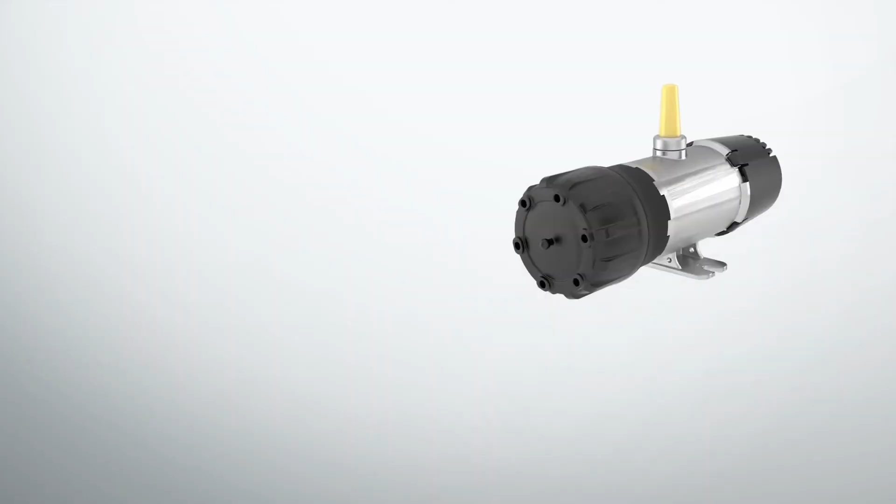British industry is changing at a rapid pace. Innovative new technologies have changed the way things are done, and there is a growing focus on how to operate in a more efficient, safe, and sustainable way. Companies are finding they must now use the latest advances to remain competitive, and as an awareness of climate change and the problems caused by pollution grows in society, the demands of their customers mean that they must consider the impact of their operations on the environment.

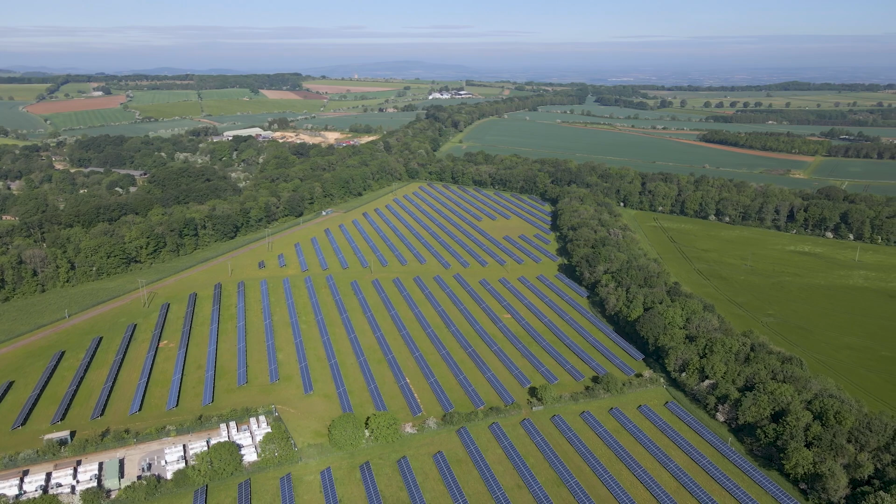There is also a growing move to turn to the use of renewable energy sources. For example, solar energy technology is advancing rapidly, making it more efficient and easier to install. In the next half hour, Executive TV will explore these new developments through talking with a number of industry experts from some of the most innovative and industry-leading companies in business today.

With increasingly clear evidence for the reality and damaging effects of climate change, key figures in industry are calling on governments to show initiative and take the lead on action to tackle the problem before it's too late.

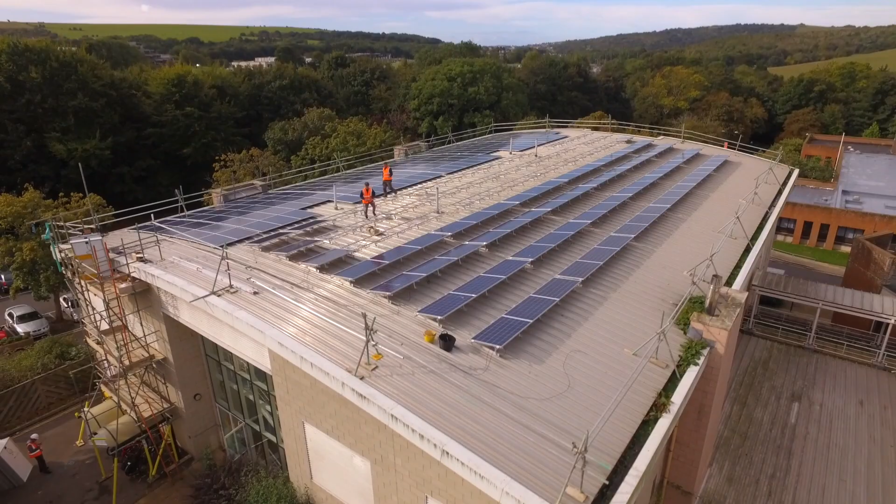We know where we are in terms of the effect that the last 50 to 100 years has had on the planet. We know that. We can't fix it, we can't turn back the clock, but we can look at the future and we can do something. Unless there's the investment, unless there is buy-in across everyone, from local government to the government as a wider scheme, to the corporates, to the individual, to the household, to the system, to the property owners. Unless we're all saying, right, I'll do my bit, then nothing's going to change.

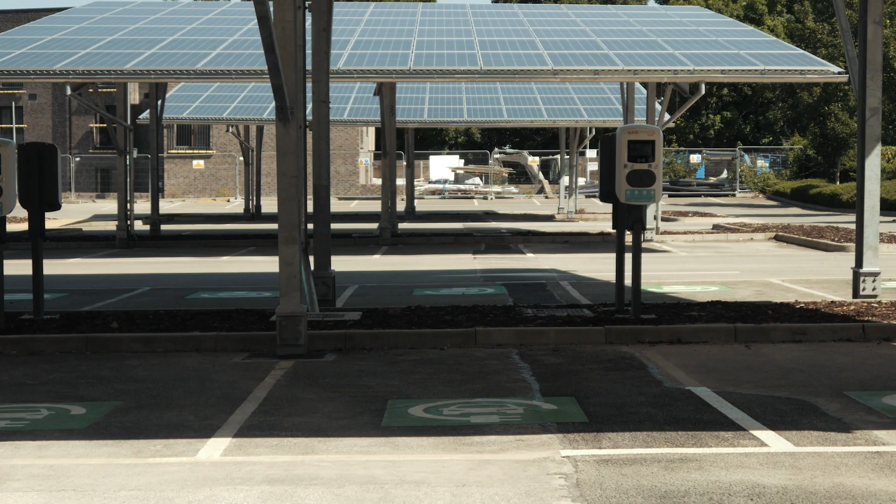We need to basically make sure that we're reducing carbon emissions and putting in place methods to mitigate this and to offset it. The government has got to step up in creating that infrastructure and creating the incentives and opportunities to reduce these emissions and develop low carbon technologies. We need to be developing in this future, we need to be pushing it.

There's been a number of years where the energy industry in Scotland has been perceived as declining, and this is a new wave, an energy revolution as it were, and the Scottish Government is absolutely on track to harness this to its full potential. They have set up programs between countries. There's a specific program between Scotland and Germany, not the UK and Germany, Scotland and Germany, to export energy in whatever form that takes, whether it's electricity or hydrogen. And the Scottish Government is very aware of the energy resource that we have in our wind power, so they are working very hard to make sure that it's harnessed to its absolute maximum.

With regards to the government and the offshore and onshore renewables, there should be more money. From a complete finance perspective, there should be more money put into this. There are so many other things that they do, but in reality, what drives everything within this sector is money, and how that can be spent in a better way to actually provide better offshore and onshore renewables.

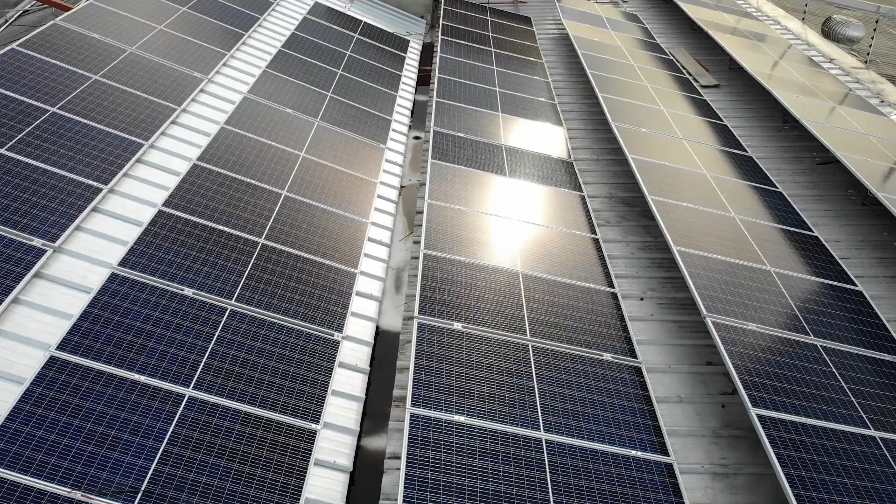Customers are demanding change, making a new focus for businesses and organisations on becoming more sustainable in their products, services, working practices, and supply chains. Many business leaders are genuinely concerned with their organisation's impact on both the ecology and local communities. Innovation is proving key in this new focus. New ways of doing things can lead to both efficiency and sustainability.

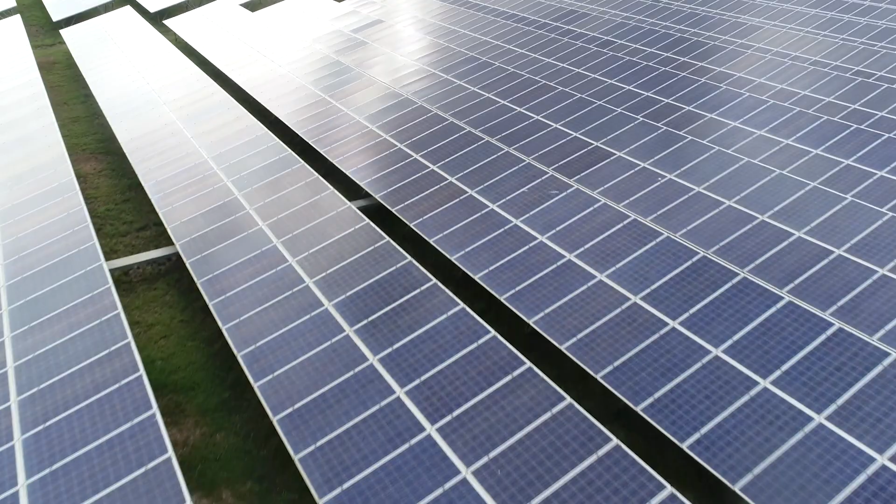Across the UK, a range of sectors from agriculture to commercial organisations are now looking to the low-cost and sustainable energy benefits offered by solar power generation, and its part to play in working towards the target of net zero emissions by 2050. Sustainability is very important, and I see it as becoming even more important as we move forward.

Everyone is focusing on making sure that their business is as sustainable as possible. It is a question that we are asked now by potential customers in a way that we weren't before, and we have to demonstrate our sustainability credentials. But this is not just lip service. We actually need to do this as the human race and for the planet as well.

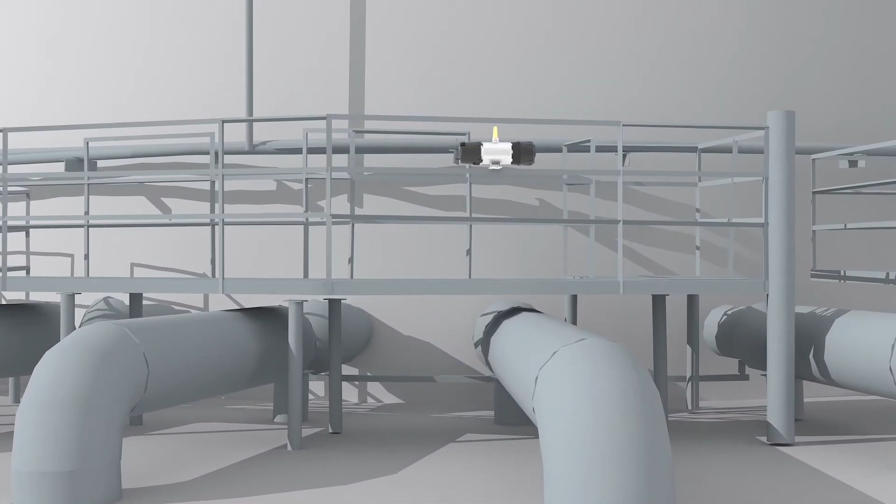One of the things that we have brought out recently, which the main focus for the customer was to be able to increase safety at a reduced cost, has actually had a sustainable side effect. This is wireless gas detection. We are able to implement gas detection across large areas, say of oil terminals or refineries.

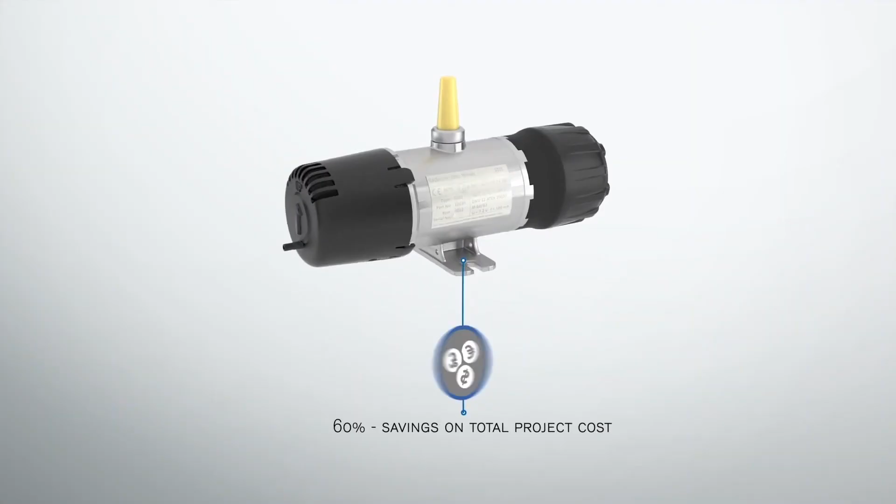This wireless communication is something that has been around for people in their day-to-day lives for a long time. But when you bring that into an industrial environment, you have to do things differently. It must be more robust, more cyber secure, and more reliable. This isn't just like your normal Wi-Fi. So as energy prices increase, we need to be looking at other methods of sustainable energy, and therefore we need to look at new technology.

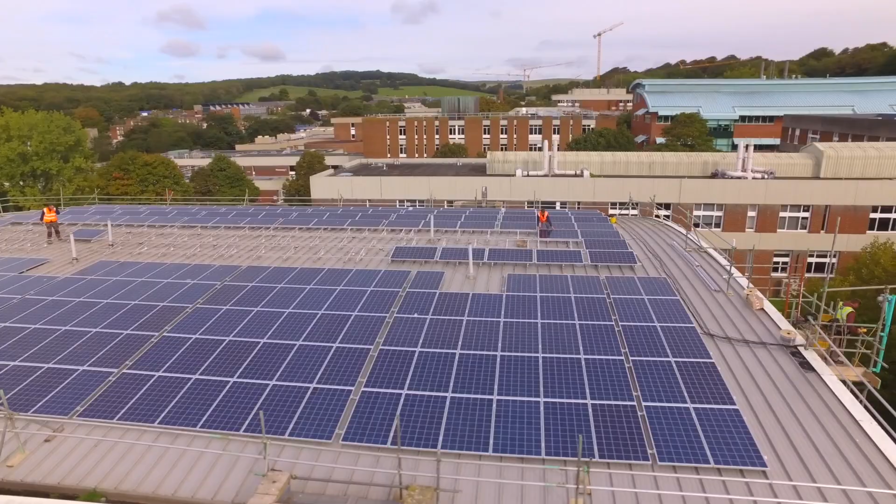And therefore it's vital that we push towards implementation of those into our business, so that we make cost savings on our balance sheet in terms of reduced energy consumption, but also by utilising energy more sensibly. Renewable energy needs to be more accessible, not just for the user, but in the manufacturing process. It needs to become more affordable and more accessible to individuals, companies, people.

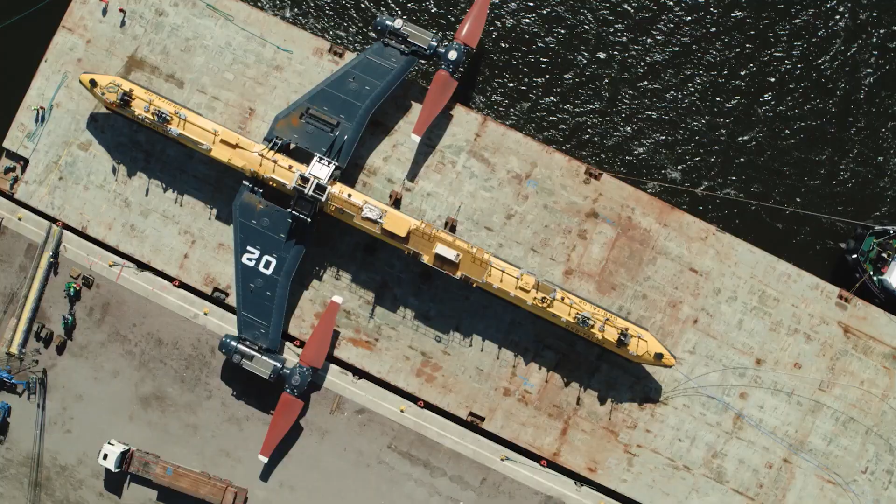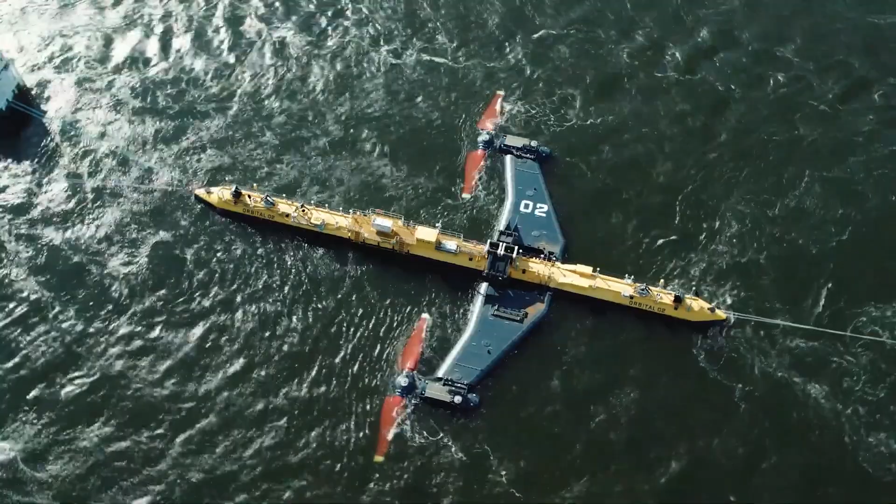Renewable energies are key for Britain. It's part of our journey as a company to work in the renewable sector. We are in the renewable sector. Would we like to be more? Yes. There's a lot of these big renewable projects being carried out all around the UK, and it doesn't seem to be being built in the UK. This seems to be getting put into other countries that can build it a lot cheaper than the UK, and it's not fair on companies. It's not fair on companies that really want to work in that marketplace and really want to build a future in there.

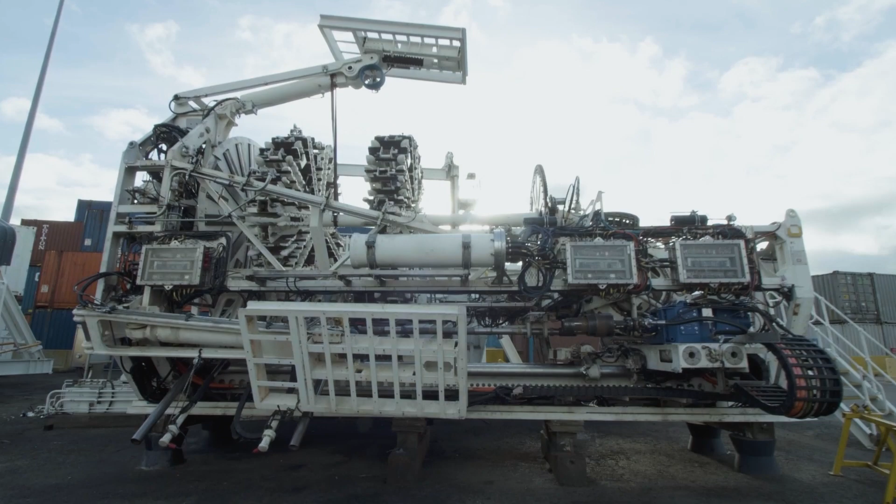But we need that sort of support to make sure we can make it viable. I think it's very important for sustainability in our supply chain. It's all about keeping it local content. If we're going to be building something in Scotland, everything should be locally sourced. But again, that's very difficult for us to do when we are competing against other countries. And that's what I find very difficult with sustainability. How can you have a project in the North Sea, but it's getting made 5,000 miles away and shipped across? I don't understand how that sort of works for a company to be sustainable when you're dealing with that kind of marketplace.

Obviously us as a company are only just starting this journey. We have an opportunity as well that we could be building another facility that will be run purely on hydrogen. So as well, we've got our vans - now we're getting electric vans onto the fleet. It's really looking at us as a company: what can we do better? How can we do it? It's obviously a journey that's going to take us over a number of years, but we're always looking at other ways to be smarter and greener.

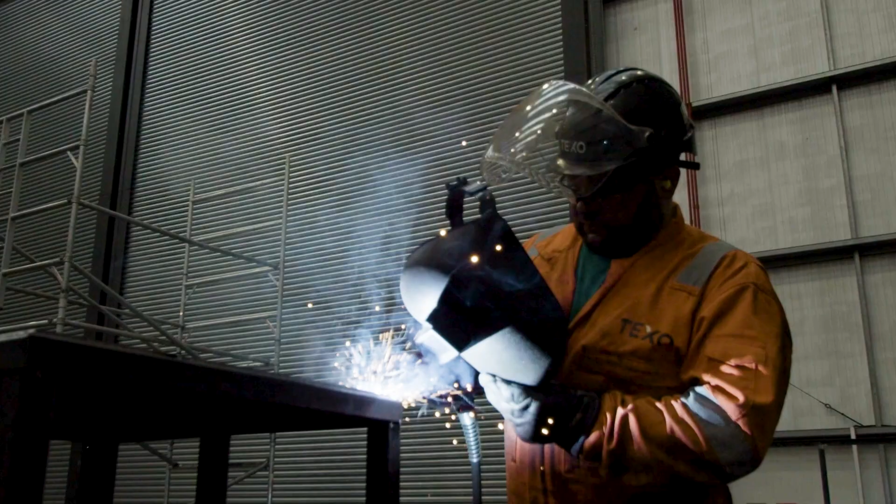The role is we support all renewable and offshore vessels here at the Port of Blyth - vessel mobilisations, demobilisations, as well as bespoke fabrication for the energy sector. The biggest environmental challenge has been being so close to the river and the North Sea. A lot of equipment that we build, we have to assemble, and that would take hydraulic oil. So we need to use bio-friendly oil to make sure that there's no leaks that go into the river and respect the estuary that we're working on, and respect the North Sea.

We try to make us more recession proof, looking at different markets we could penetrate and making sure that these 7 companies become one - moving away from the silo mentality to form a one-stop shop with 7 services all working for the same common goal, and that's TEXO.

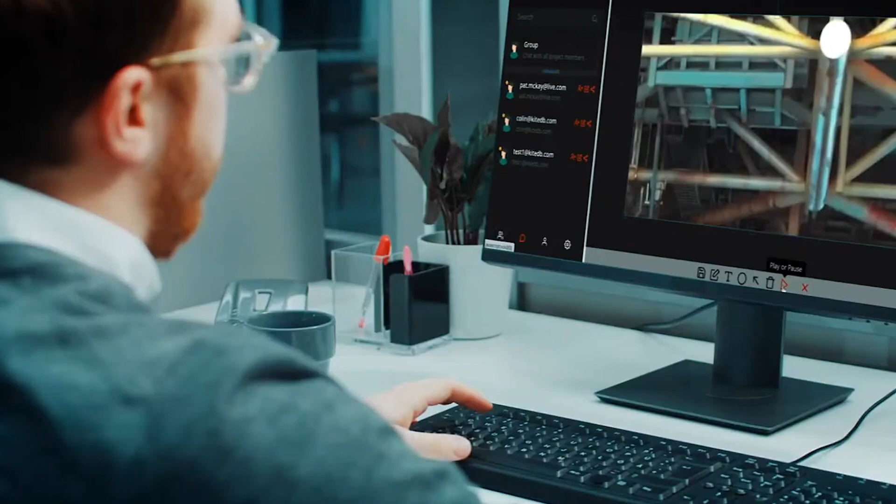So the 7 services are: engineering fabrication; recruitment, which is an external agency but also handles our internal guys offshore; workspace solutions, which is modular buildings and office space, both onshore and offshore; integrity, which is rope access, NDT, and inspection services; then Livestream, or TEXO Technologies, which caters for anything to do with the technology side of what we do; then Port Services, based in Blyth, which does a lot of vessel mobilisations and complex operations, and we have a facility there for fabrication; and then in Witham, Essex, we've got TEXO DSI, that's our drone and surveying side of what we do.

Innovation and new technology have meant safety is also a focus, and this area is also moving forward at a rapid pace. Advances in gas detection monitors are also making safer environments for oil rig workers and firefighters, with the potential to save lives. Safety is a massive concern for our customers, and I hope that we can take care of that safety aspect with some of the technologies we use. If you look at the drones, that takes away the necessity for people to go into unnecessary environments, be it on top of a roof or inside a cargo tank - we can do that by a drone.

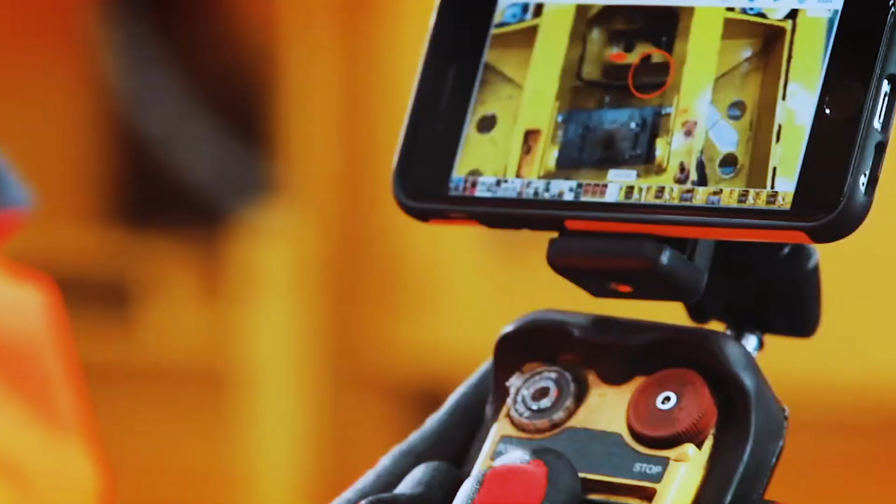We've then got the live stream capability as well, where unnecessary travel, no need to travel anymore, that can all be done from the comfort of your office. So it really stops putting these people in hazardous conditions for no reason.

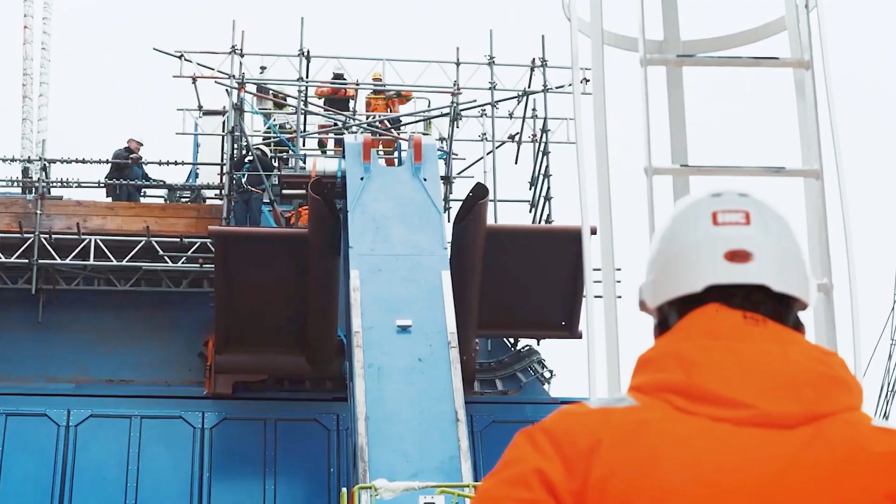The extreme environment of the offshore sector means that the equipment we fabricate and assemble, we also have to follow it out to offshore. That means having our guys and girls fully trained in offshore survival, helicopter training and rescue, and they'll be out for weeks on end commissioning and installing these pieces of equipment offshore.

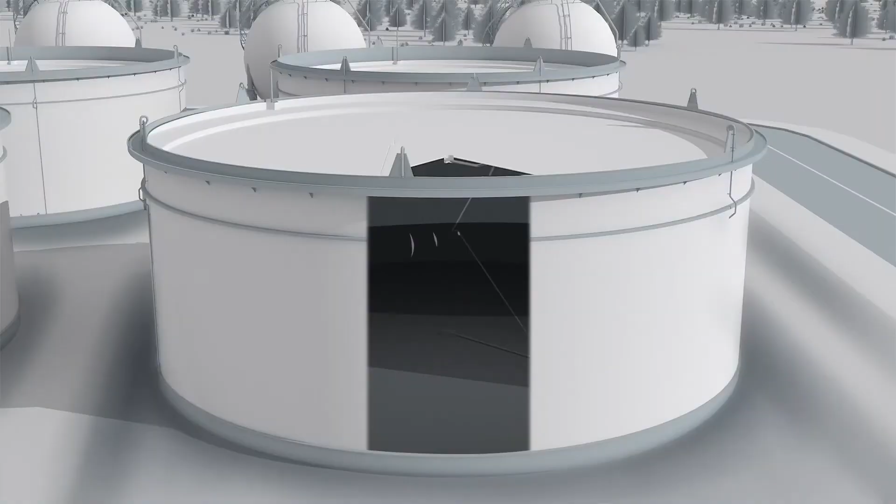Obviously our equipment has a battery in it, which is a source of power. The way it works is, should gas get into that device and that gas be ignited, the device can contain that explosion. That is how essentially ATEX equipment works - any explosion would be contained within that device. It would not get outside of the device and therefore could not cause a secondary explosion. The equipment has to be very robust.

This is something relatively new because in our personal lives we rely so heavily on mobile devices, tablets, phones - we're absolutely glued to them. But as soon as you go into a zoned area on an oil terminal or a refinery, you lose all of those pieces of equipment in their traditional sense. What you have to be able to do is put that electronic equipment into something that's safe enough to be taken into somewhere where there is an increased likelihood of an explosive gas.

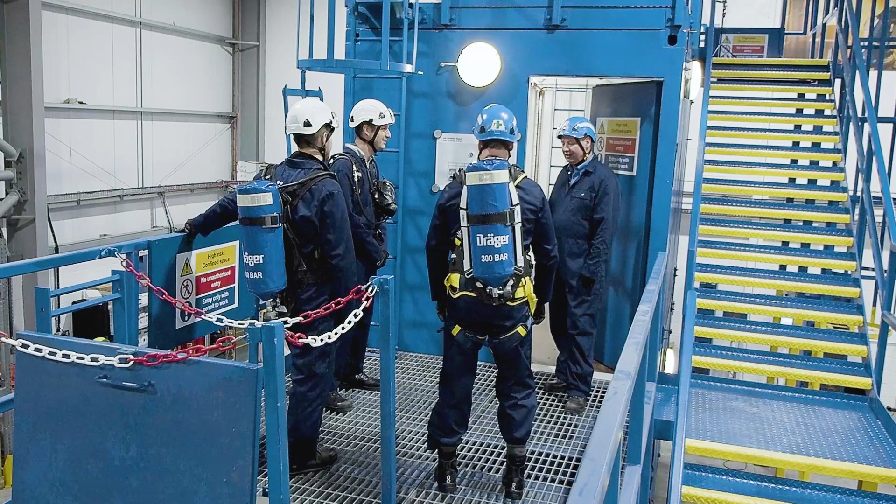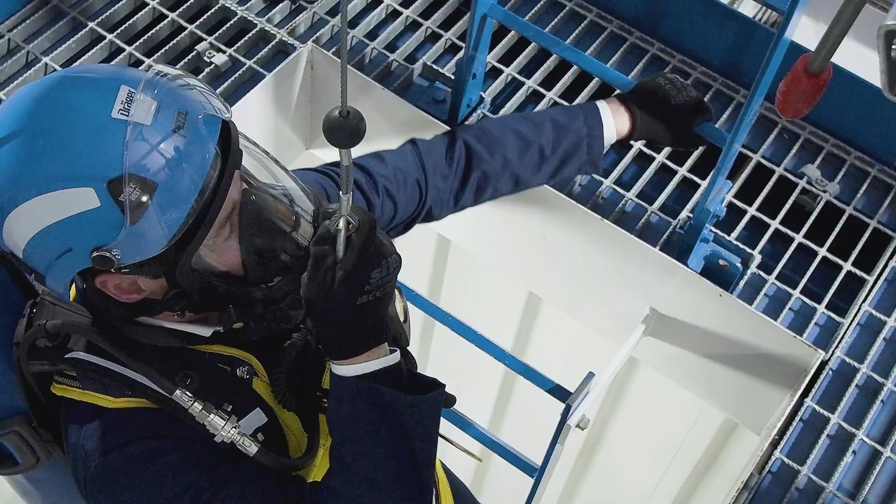That's what we're trying to achieve - bring in these more human elements where people need to physically go to a space. They need to physically provide what we call clearance measurement, which is essentially taking a reading from inside a vessel. Confined spaces are always the most dangerous in terms of explosive potential because you've got the high likelihood of an accumulation - there's not the ability for the gas to just disperse in an outdoor environment. So when we go in and clearance measure a confined space, we can send that information directly back via this Bluetooth link to an ATEX mobile phone, for example, that they are now allowed to carry on site. And then they can move on to the next space, as opposed to having to walk back to the permit office.

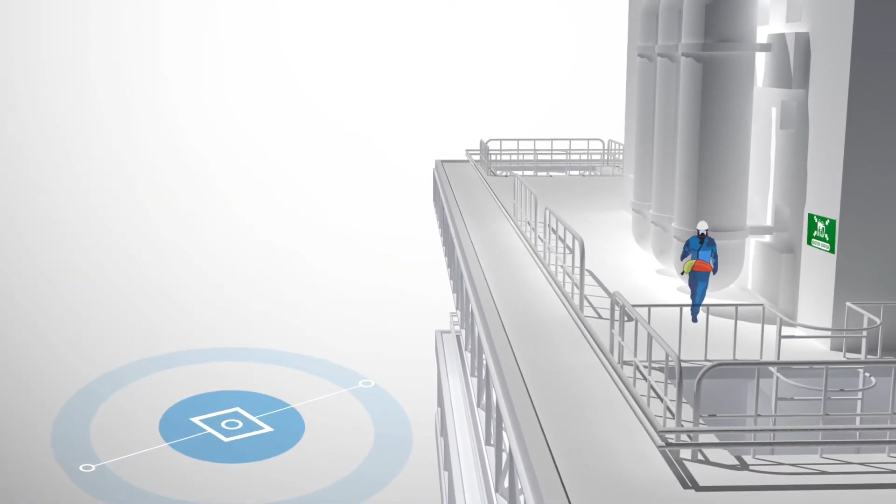It's a conflicting pressure, isn't it? These companies want to keep their people safe, but we live in a time where there's a lot of pressure in the economy, and companies are under a huge amount of pressure environmentally and under efficiency to produce these technologies in a clean and sustainable way, making sure we don't lose gases into the atmosphere that shouldn't be lost. Dräger wear these two hats of protecting people, but more and more so now, what we do is also protecting the environment by making sure these processes are safe and they're not losing gases into the atmosphere that they shouldn't be losing.

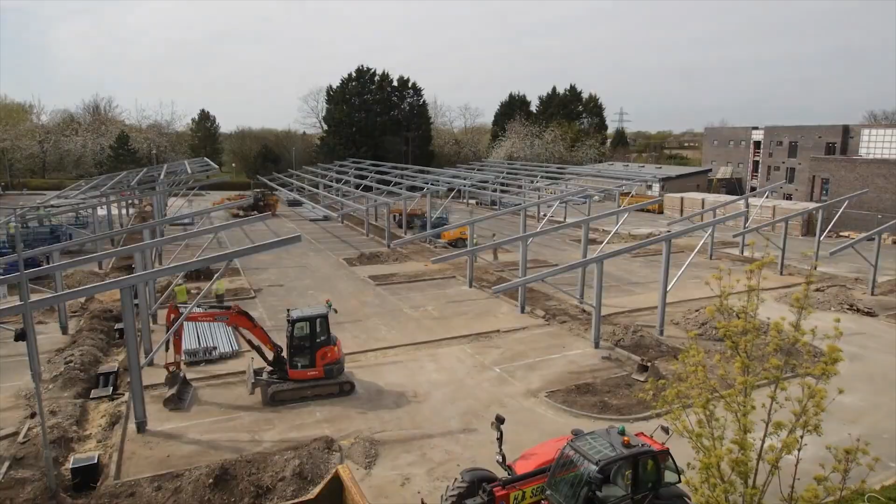First and foremost, safety is so important with a solar PV system. Keeping your system maintained is also about the longevity of the system, which also ties into performance control, maintenance, and generally keeping the system's lifespan.

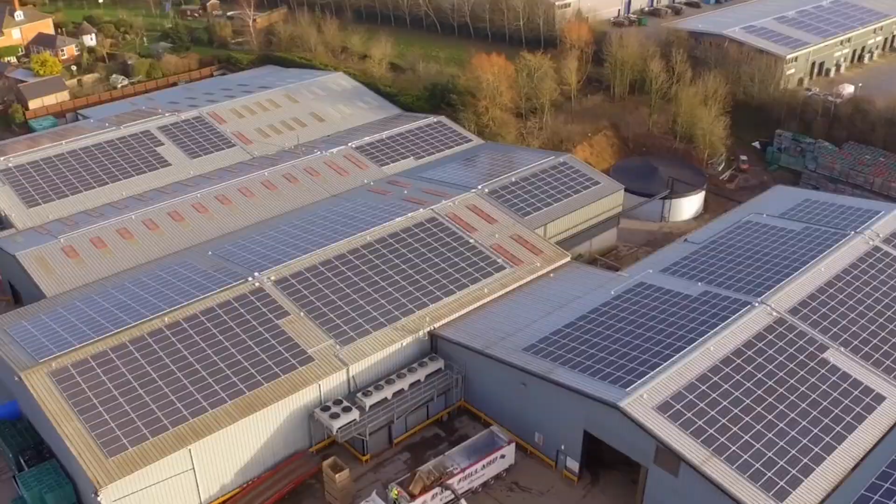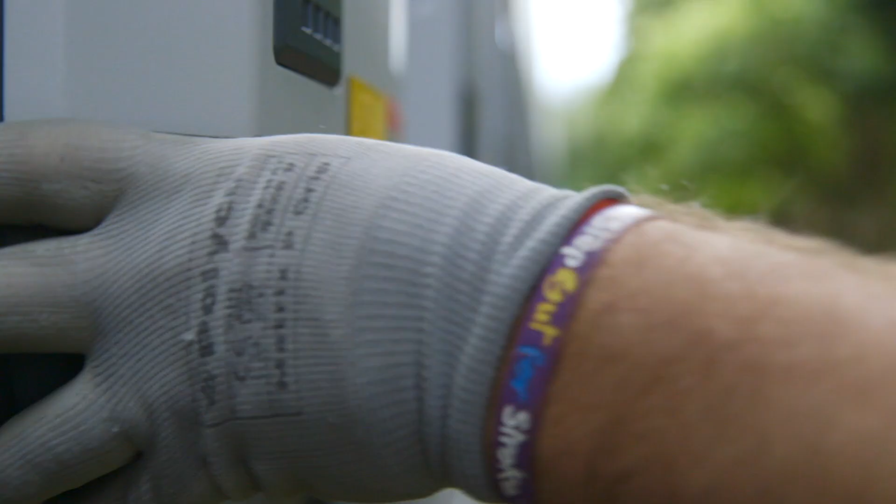At our head office, we have an advanced visual display system where we're able to monitor and keep track of our client's solar PV. If the system has got any issues, it will alert us, and we can then look to send engineers to site. This helps alleviate any downtime the system might have. So in monitoring the systems and seeing the faults and errors, when we attend site to rectify these, it obviously stops any system downtime.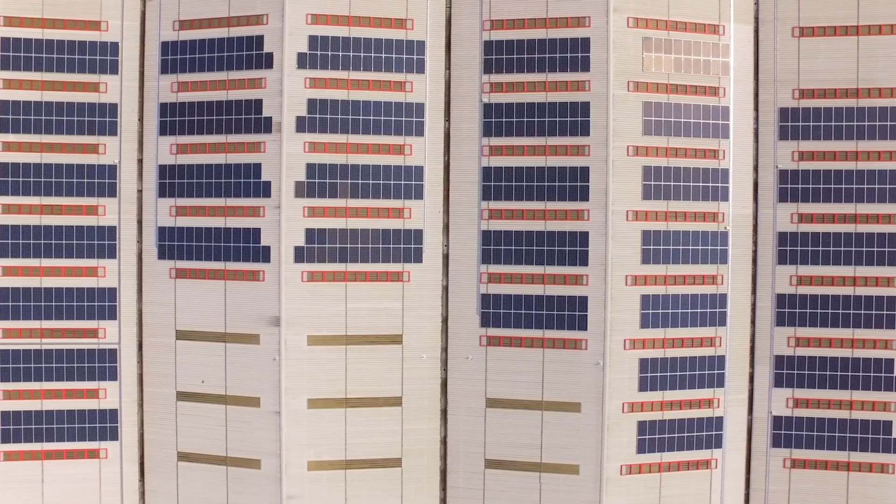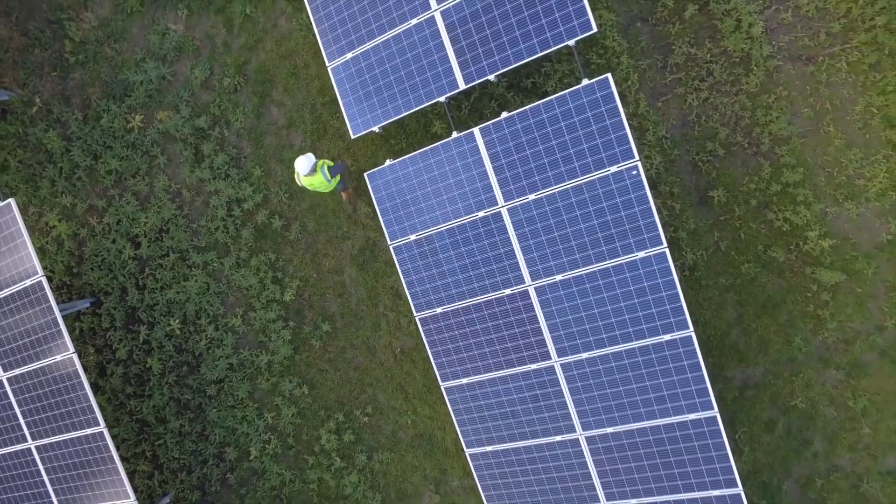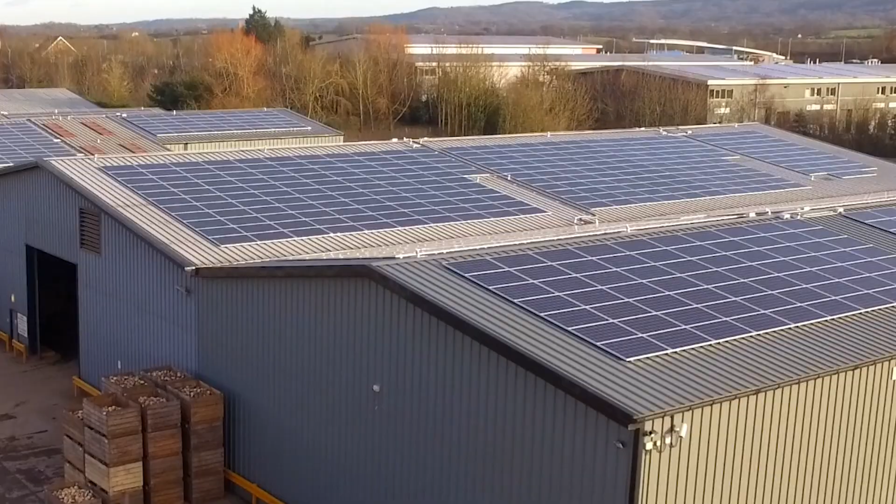We also need to put emphasis on maintaining solar PV systems. At present it's not a legal requirement, but going back to the safety of the systems, if we don't provide the maintenance required, they can become a danger to life - similar to how we would not MOT our car, which is a legal requirement, or gas safety checks, which are also a legal requirement. Really it should become a legal requirement as solar becomes more widespread. So that's something we offer - we offer all of our clients operations and maintenance packages whenever we complete an installation.

The way in which a solar PV system is installed, we need to have safe roof access for our engineers, we need to have edge protection, we need to have man-safe systems in place so that when we send our engineers to carry out the maintenance, it's actually achievable and safe.

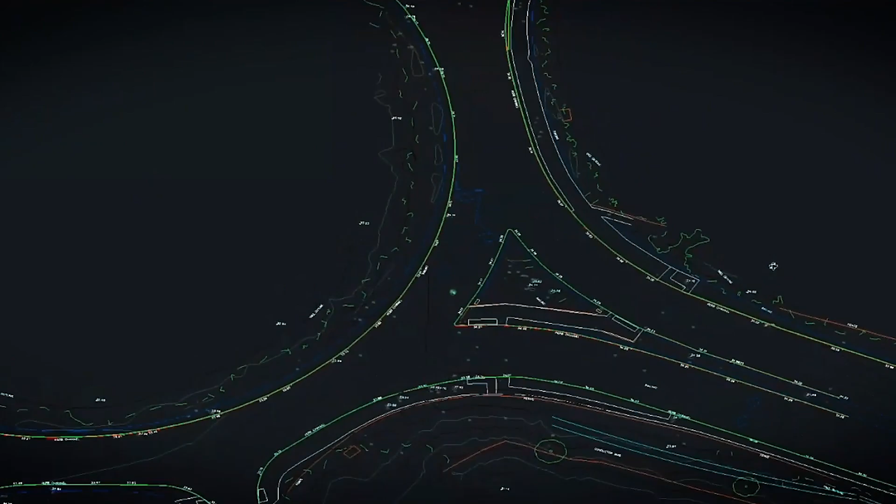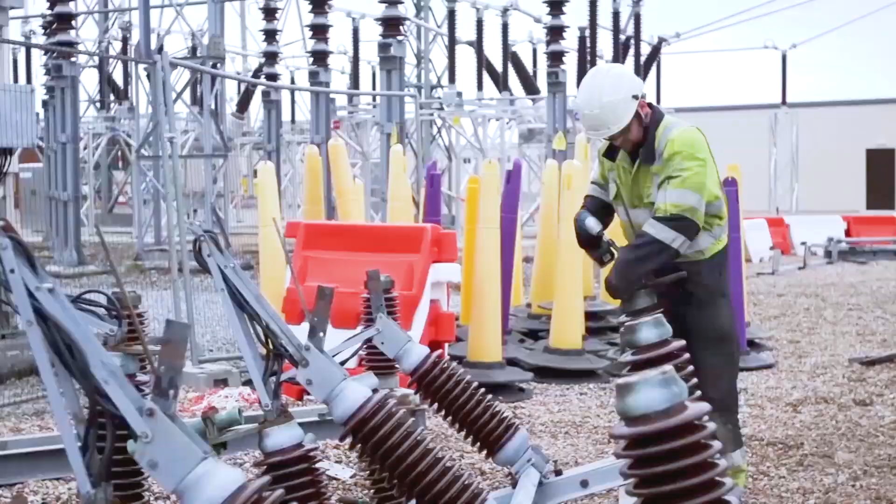The rapid changes in technology now require changes in the skills and training along with them. Many industry leaders attribute this to a lack of focus on STEM - science, technology, engineering, and maths - in education in previous decades. A new focus by both government and employers is tackling this by offering exciting apprenticeship and graduate schemes designed to inspire the next generation of workers.

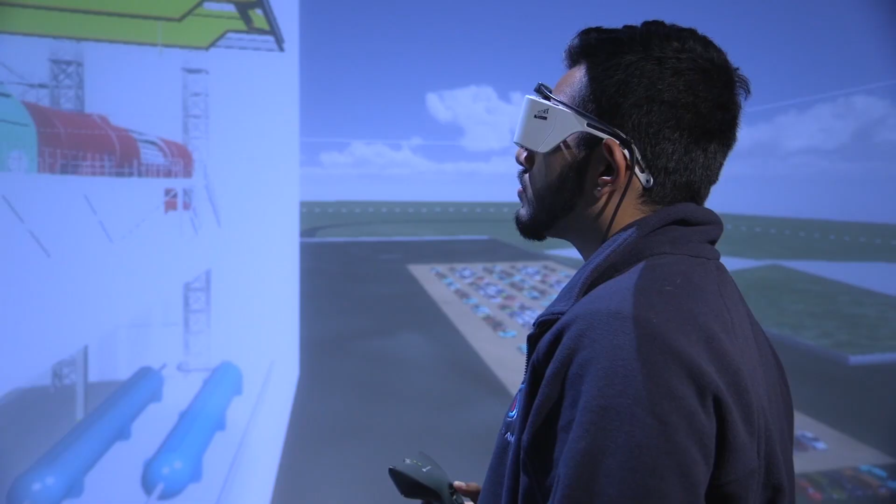We cannot find qualified engineers, we cannot find that knowledge of the industry. Yes, it's been around for a bit, but when I started in this industry 15 years ago, there were courses on PV, there were courses on some of these renewable technologies.

Now you look to try and find some of those courses, and the colleges have closed. The colleges no longer support that course, and you're struggling to find that kind of availability of education.

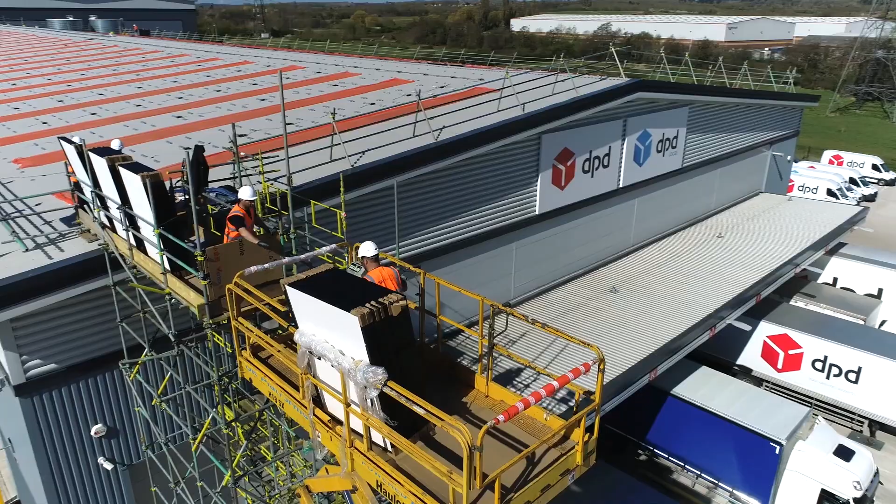It's the children that need to bring this forward. We need to be talking about renewables in the classroom. There's nothing better than the idea of your child coming home and talking to you about recycling, about what are we going to do, how we. That's brilliant, that's some of the things that schools are doing.

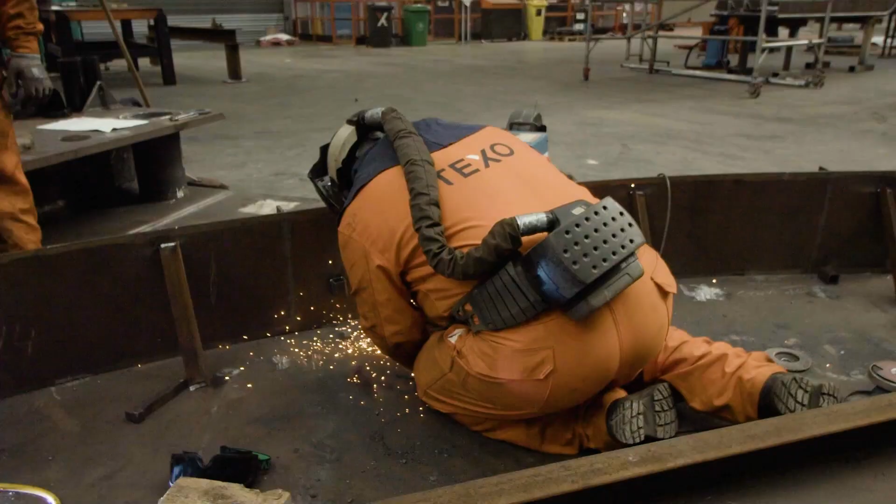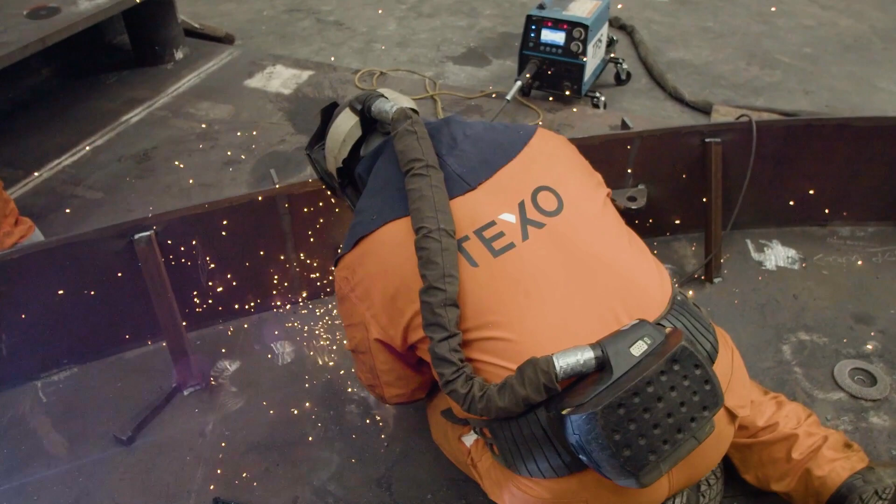Apprenticeships are very important to TEXO. It's something we work alongside a lot of colleges with. We want them to understand our needs. We speak to them a lot about what we're trying to achieve, what we're looking for in graduates or apprentices to come into TEXO. We want engineering and fabrication where we can bring them in and hopefully get them on that career path where they can take us to the next level.

What I'd say to a young person wanting to get into manufacturing, I'd say try it. It's a lot more appealing than what it seems like, and especially working for us as a company, once you understand what we do and the technologies we add into what would be a kind of mundane manufacturing job, it's a lot more than that. It's about opening people's eyes to different ways of working and to speed up the processes of what we do.

I think there is a huge skills gap in manufacturing. Companies need to do a lot more to inspire the next generation of men and women to get into manufacturing and engineering. That could mean going into schools, inspiring them, bringing schools to their facility, taking 3 or 4 hours out. If you bring in 30 children and give them a full tour of the facility, and you only inspire 1 or 2, well that's brilliant, because that's 1 or 2 that wouldn't be inspired if those companies had never gone forward and tried to make an effort.

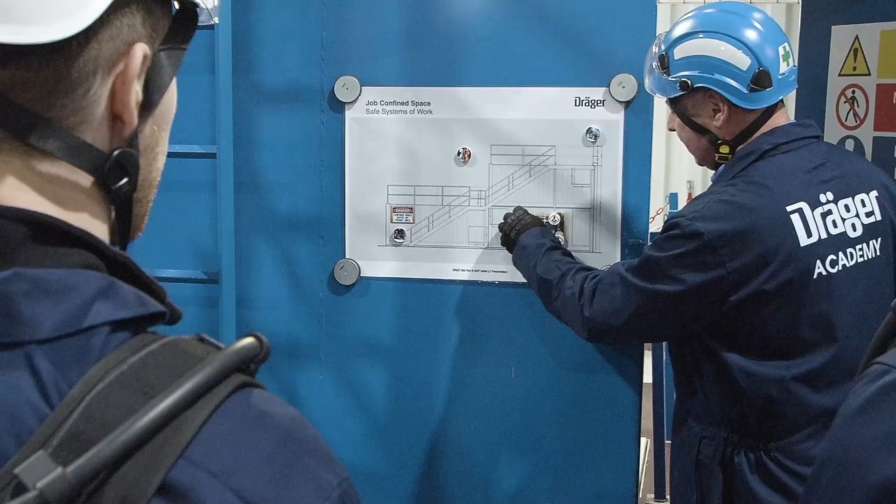So training is paramount. Devices cannot be released into countries without staff being trained prior. This takes the form of approved courses from the Central Academy into the regional academies and trainers within it. Any required and relevant training would be rolled out prior to any product or technologies being released. With all our advancements, technology allows us to deliver training in a blended learning environment to a multitude of industries.

The way that COVID has affected the industry has been fascinating. It impacted everything, the way that the reduced manpower was available on the platforms, because normally you have 2 people to a bunk or to a room. That was no longer possible, everyone had to have their own room. So that meant you had half the manpower available for maintenance. So then you have to find the most efficient way to achieve the maintenance that's required in order for the platform to be able to function.

And this had a great benefit. Lots of these support services were moved onshore, and the way that we used electronic communication changed, and it really sped up some of the technology developments.

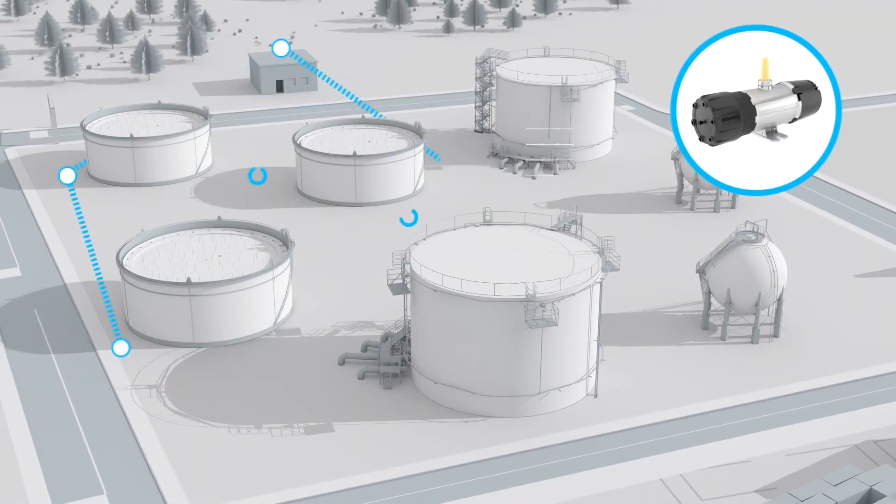The use of data and artificial intelligence is leading to a more efficient and sustainable world for industry. Remote vehicles and increasing automation are making working life for those involved in the maintenance, monitoring, and servicing of projects in extreme conditions safer.

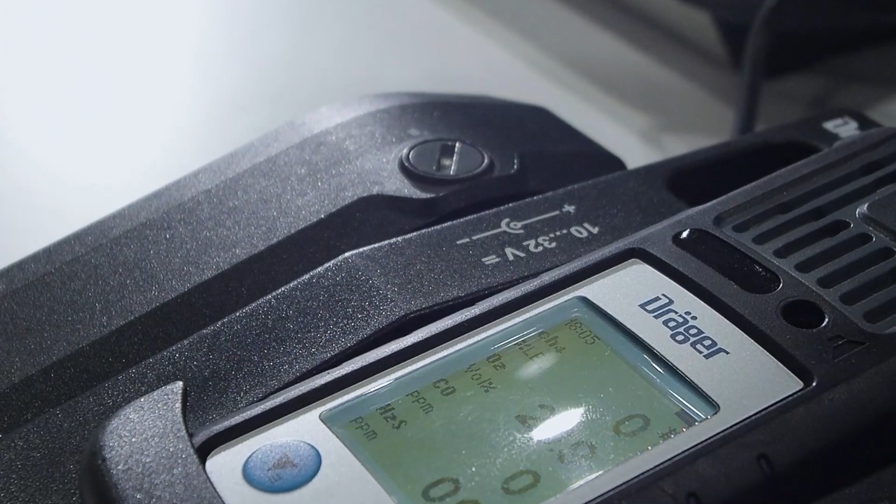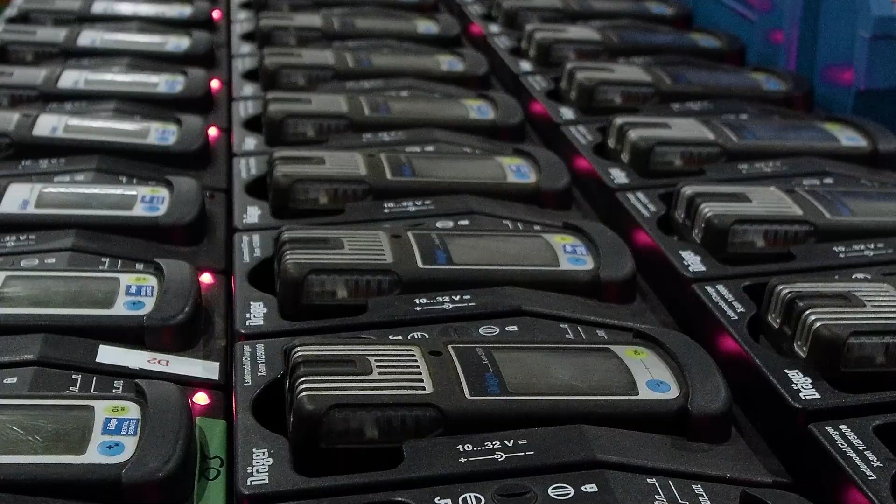I think innovation is very key to keeping pace with sustainability and protecting the environment. We need to be continually looking at the way we develop and package products, and make sure that everything we do, we're always trying to either help the device we supply assist that process, or even our own internal processes in some way, helping reduce our impact on production of such devices. We issue something like 250 patents every year for new technology, but what we don't want to do is bring out new technology for new technology's sake, that in itself is wasteful. So we can talk about how we've managed to bring some of the more business-to-consumer technologies into our business-to-business technology.

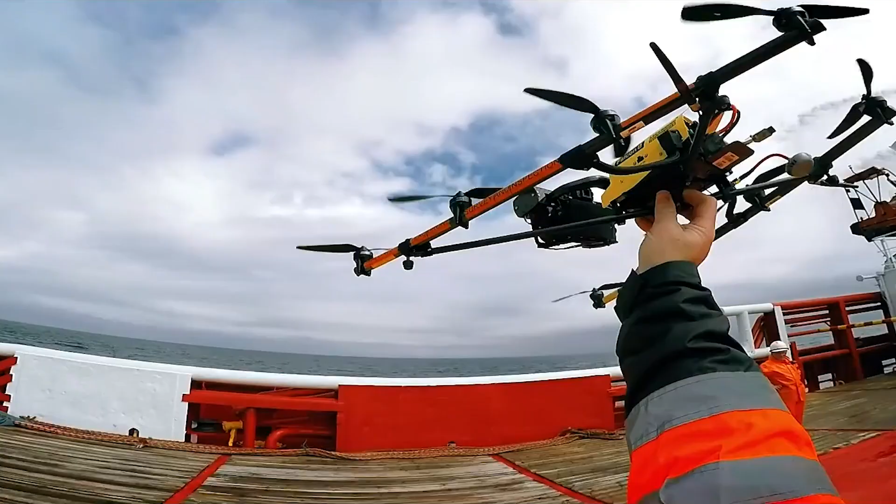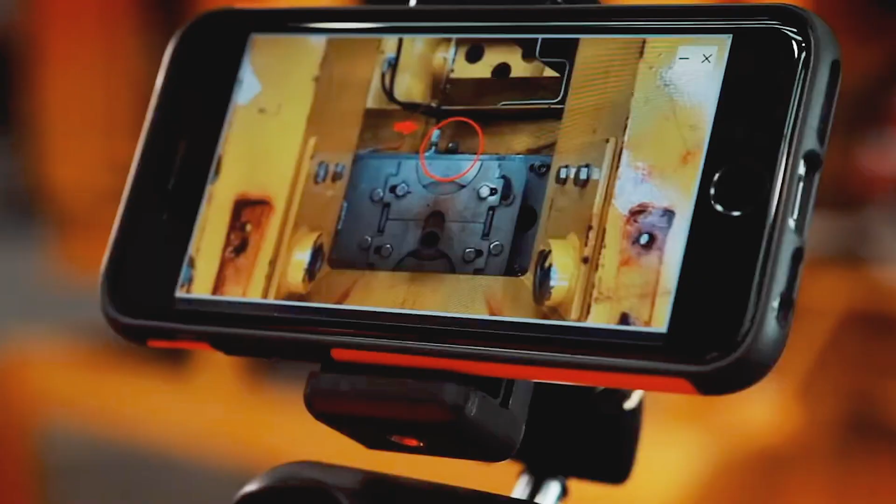Research and development is a massive benefit for TEXO in the future. What we offer as services is your bog standard, everyday industrial kind of work. So to have parts of the business that are more technology focused is something we need to concentrate on, because that will be the differentiator between us and another. So always developing, always looking at what we can do with some of the drones, with some of the hardware we use, looking at the cameras with the live stream, how we get analytics, how we store that data, how we give that data to customers, is everything we strive for, just making their life a lot easier.

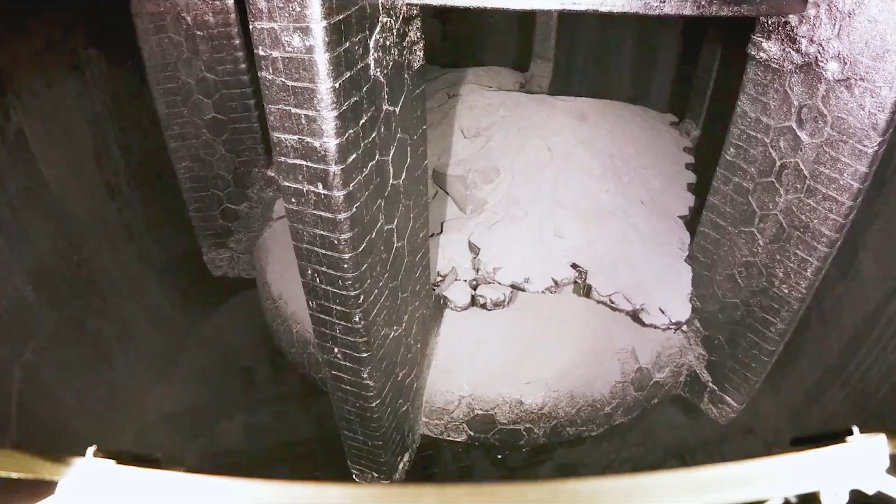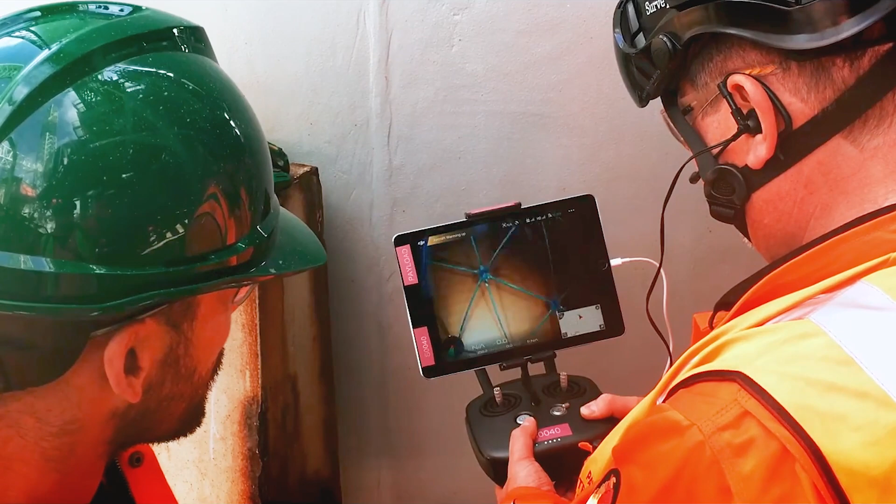New technologies that will play a major part in the future of the industry would be our internal drones. Years ago you would have to send people with breathing apparatuses and risk assessments into confined spaces. Now we can send these robotic UAVs into a location where they can scan, which takes away the health and safety risk and the carbon footprint of all the gas used for breathing apparatuses.

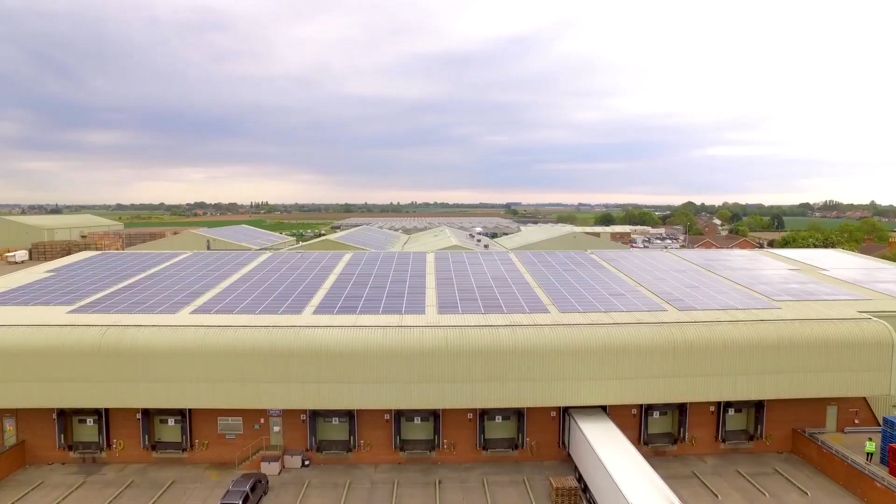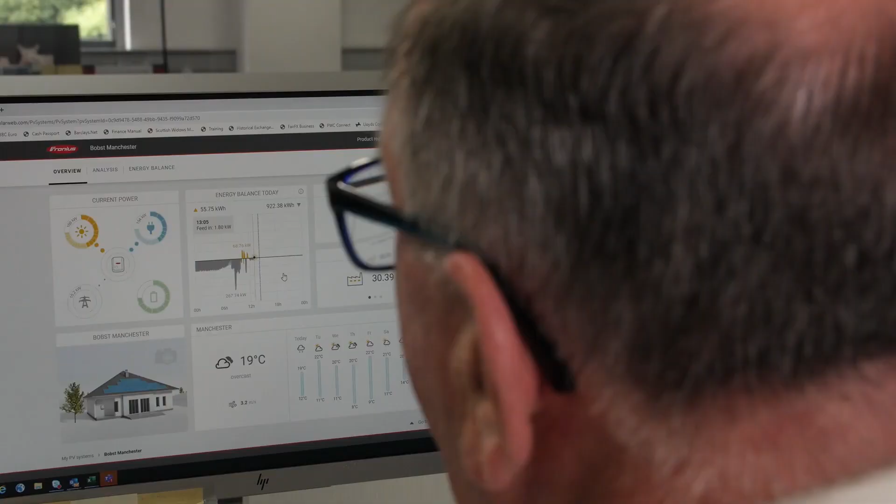Latest innovations for solar PV systems really come from the remote monitoring of the systems. We can see live data in the office without being on site, see what the solar PV system is generating, if there are any faults, and carry out monthly checks and reporting back to our clients so they can see the system is actually working to its expected generation and what it should be producing over the last month.

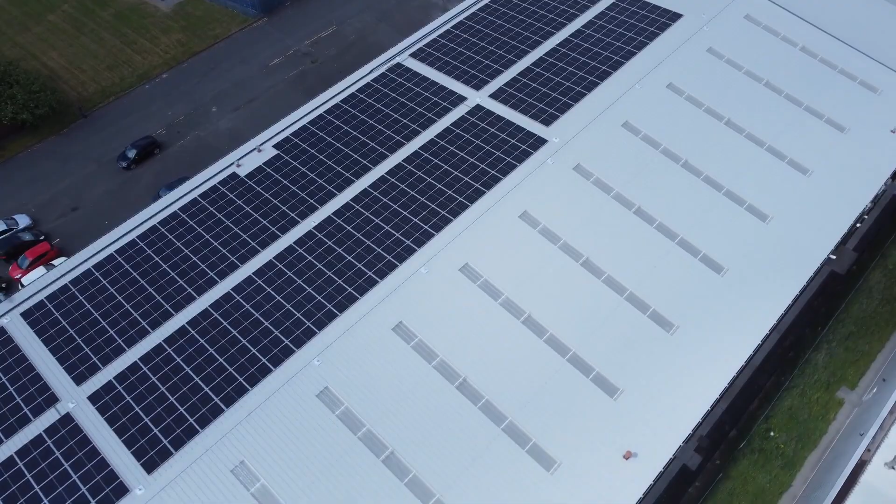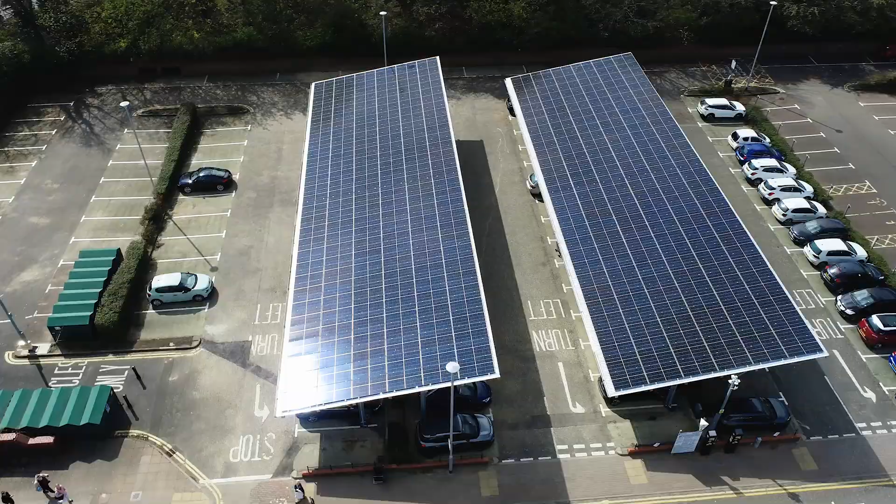There's a system we can see which actually provides monitoring for each panel individually, so we can see each panel's live generation throughout the day on a layout of the solar array. It will tell us if there's a fault with just one panel, another panel, or a bank of panels, and we can react a lot quicker and tell the client they've got an issue with their system, then carry out the remedial works.

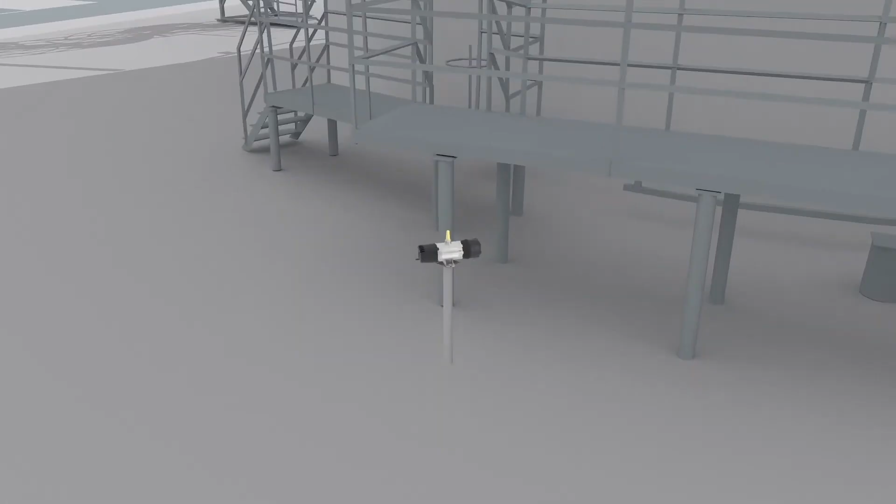Efficiency in manufacturing relies not only on working practices, but on technology as well. Having interoperability in a product can expand not only its value, but also the productivity of the end user. Bluetooth is a technology which, when implemented correctly, can bring great benefits.

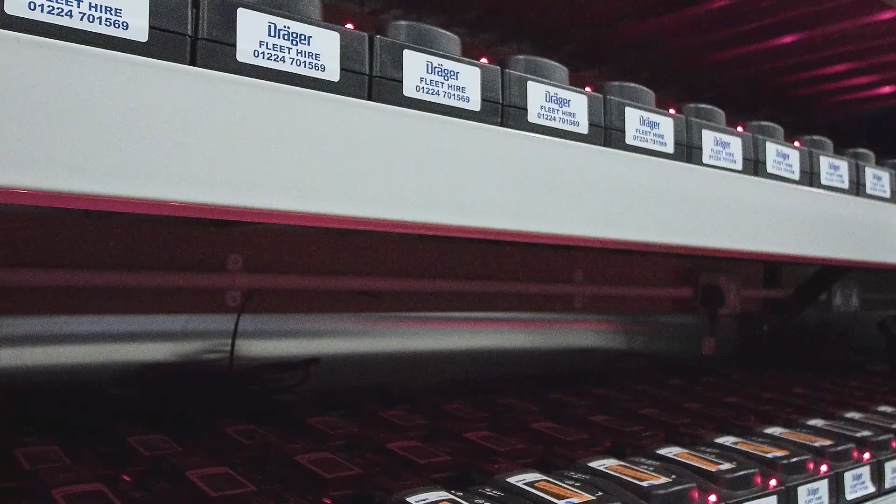Connectivity is becoming a really big piece, and I think some of this has been driven through the pandemic with people working from home. Implementing Bluetooth into some of our products means we can get better interoperability of our devices. It means people can go out and perform clearance measurement on a tank, essentially measuring the gas concentration to ensure that it is safe.

Historically, they would then have to walk back to the permit office, which could take 20 or 25 minutes on a large site, confirm that a vessel is now safe to enter, and then walk another 25 minutes back to do the next vessel.

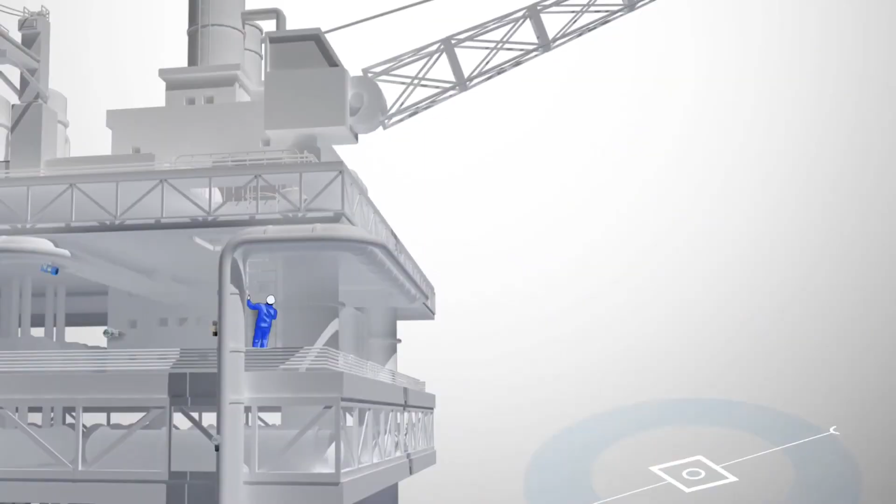Now we bring Bluetooth into our technology, which means they can email that report direct from the vessel, confirm immediately that it is safe to enter, and then move on to the next one. It's really important to use new technologies in the best way to make things more efficient, rather than just bringing something out because we want something new for the industry, because that in itself isn't particularly sustainable.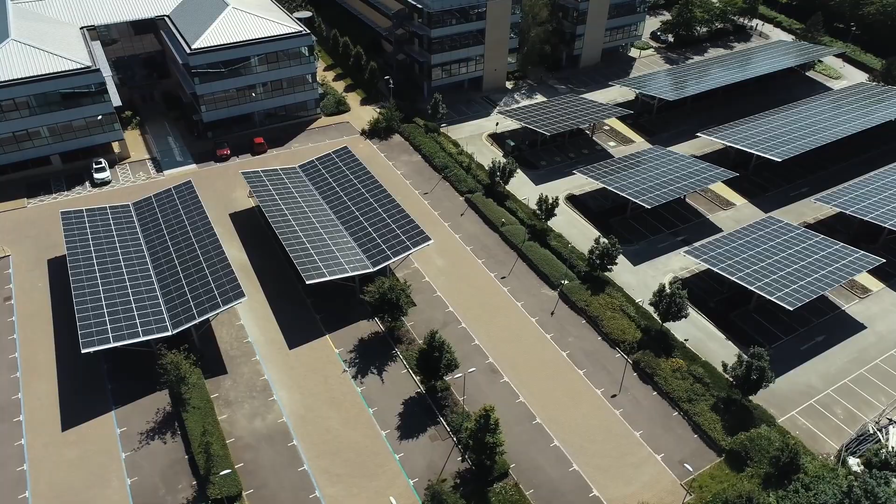Sustainability is now a focus across a range of industries, but experts argue that the government must support and lead the way if the radical changes needed are to be made in time.

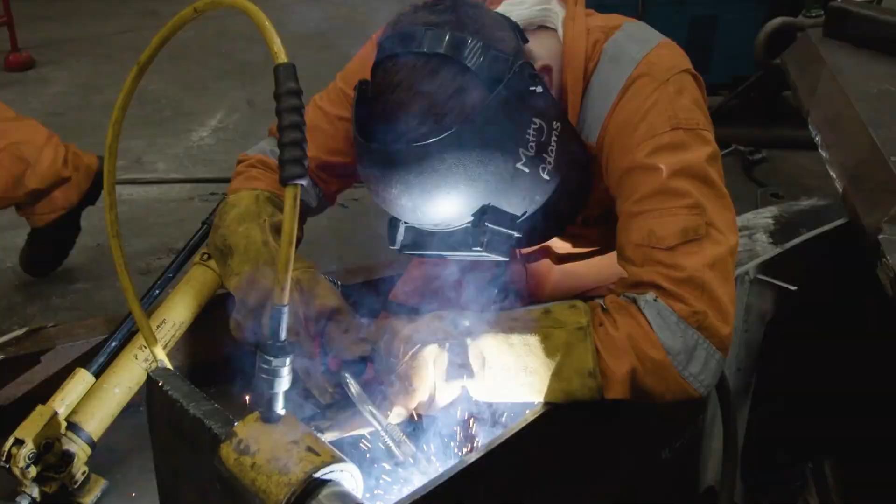I do see a positive future for manufacturing. I think one of my only gripes would be that I don't think the government does enough to keep work in the UK. It's very difficult for us as a company to want to invest into the community, into local school leavers or up-and-coming people, when we haven't got that support from the UK government, ensuring that if work is going to be built for Britain, it should be manufactured in Britain.

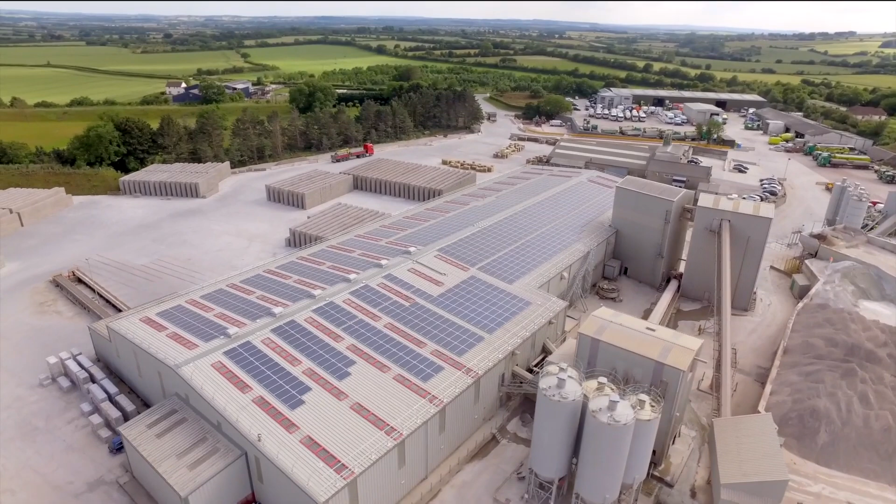In the future, I see renewable energy going from strength to strength. It is a global issue. The global fight against climate change is present and needs to be corrected now.

Seeing the cost which companies are getting back from producing their own free energy, and the fact it lasts for at least 25 years for businesses, I would say it's worth it.

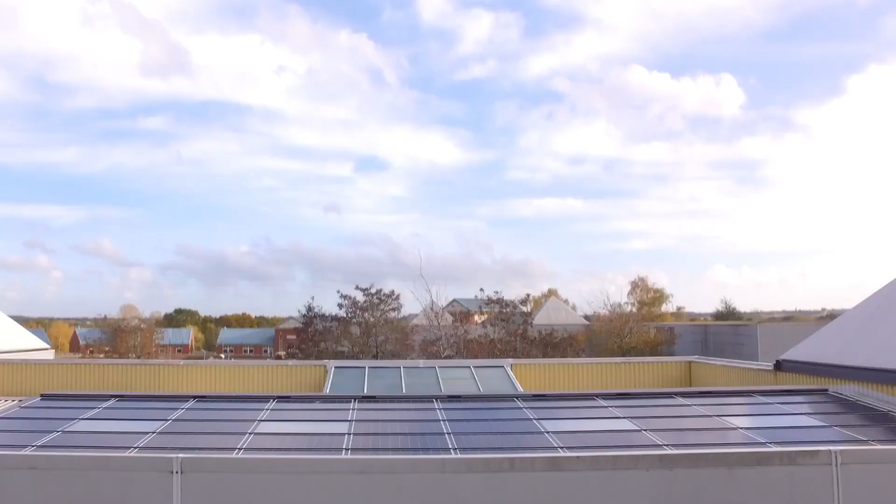Even now, more people are working from home, so I would say it is worth it even for residential, because people are staying at home more than they were before, obviously due to the pandemic. The profit comes from not pulling energy from the grid, but using your own free energy instead. Right now we've got a 50 kilowatt system, and whatever energy that is producing goes into our electrical network in the building, using that free energy before we pull power from the grid. So we're using free energy before we're actually buying power from the energy company or energy supplier.

It will be interesting to see how this exciting period of rapid technological change, and a new focus on sustainability rather than simply profit, will develop in the next few years.